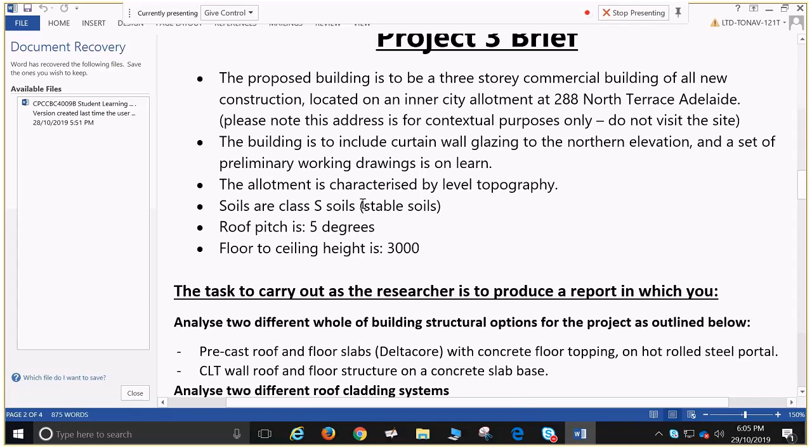So first up, have a look at research task 3 instructions. The proposed building is a 3-storey commercial building of all new construction, located on an inner city allotment at 288 North Terrace, Adelaide. Does anybody know what's at that address?

North Terrace, that sounds like university. Yep. Ayres House. Anybody know Ayres House?

No? Okay, so North Terrace and South Terrace, where they meet, on that corner you've got the Botanic Hotel, with the Botanic Gardens across the road. A little bit further west from there, walking up North Terrace, is Ayres House, a historic house. Once upon a time, before my time probably, there were many mansions around the place.

Sorry, you said North and South Terrace—they can't meet. Oh yeah, sorry, North Terrace and East Terrace. So there's a Botanic Hotel on the corner of those, and Botanic Gardens sort of diagonally opposed there.

Then to the north of all that is the old Royal Adelaide Hospital—it's been knocked down, and there's a Lot Fourteen development happening on that site. Back on the southern side of North Terrace, a bit west from that corner, there's Ayres House, a historic mansion. Anyhow, in planning and building approval we deal with that site again, just because we need sites to create context for things.

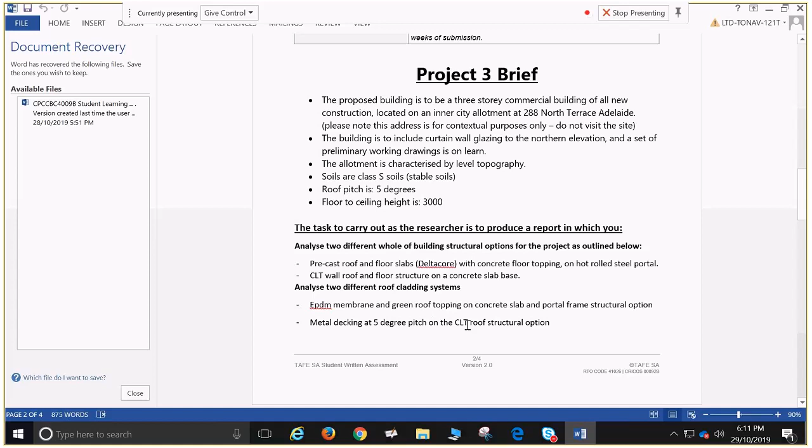Then analyse two wall cladding options. So an Alucobond Plus, that's an aluminium sandwich panel with polyethylene core, but minimum fire retardant within it. The other option is express jointed fibre cement sheet, so Cemintel Express panel.

I just said, you know what, it's going as it is, but here's the details on these. Same situation there, which is if you've got a cross-laminated timber, is that a finished product? No. And if it's not a finished product, and an Alucobond and express jointed fibre cement sheet, so you've given us a low embodied energy option there. That's where I was getting to.

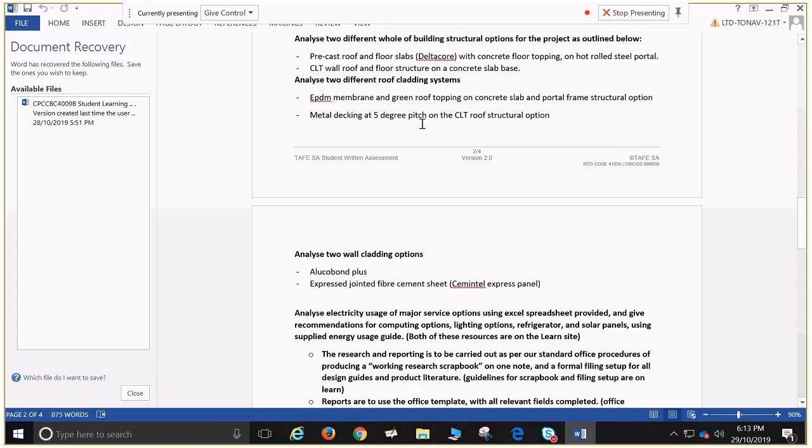That process should be fairly familiar to you. But then beyond that, this is the larger part of the assignment, analyse electricity usage of major service options using the Excel spreadsheet provided.

So is everybody here fine with using Excel? Mostly fine. I am goddess of Excel. People might be calling you late in the semester. I know the god of spreadsheets.

So no, you don't have to be a gun on Excel to use this. Everything's been put in there for you already, formulas, everything. All you have to do is fill in the yellow squares, so put numbers in. In fact it's probably best if you're not the god of spreadsheets, because I don't want you modifying it. No modifications, just filling in the yellow squares.

Using the Excel spreadsheet provided, give recommendations for computing options, lighting options, refrigerator and solar panels using the supplied energy usage guide. Both of these resources are on the Learn site.

The research and reporting is to be carried out as per standard office procedures of producing a working research scrapbook on OneNote and formal filing set up for all design guides and product literature. So once again, continue your filing system in your OneNote, and reports use the Office template for relevant fields completed.

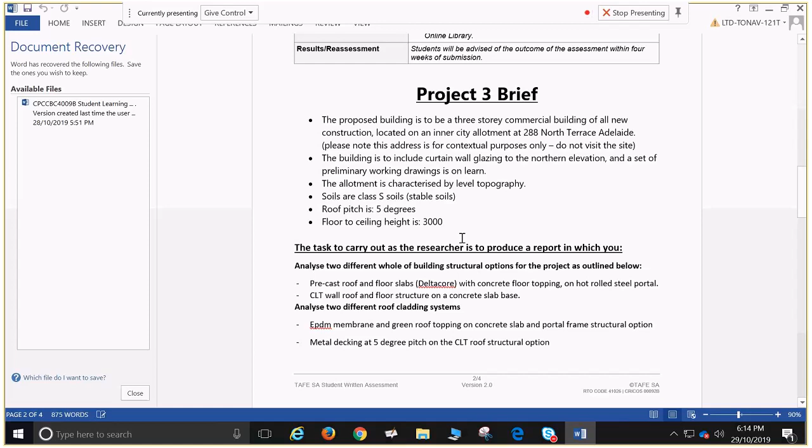Might have to close that, we need to have a look at that again. Won't go through the Office template this time. The headings have changed a bit, but work through it, and if you have any issues, come and see me. I don't think we need to bore you too much with that.

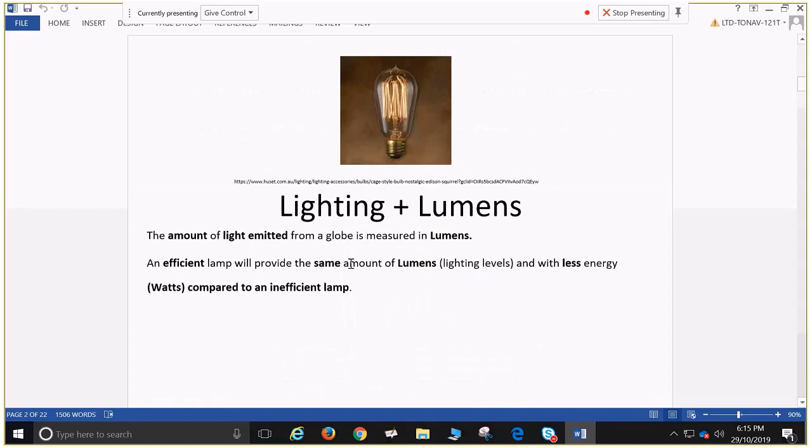But what we will have a look at is the energy calculation information. We're only just going to look at this very briefly because we'll go through it in detail in a few weeks' time. So a bit of information here on energy, what it is, use, etc. Feel free to go through this at home if you wish, but we will cover it as the last lesson in the subject.

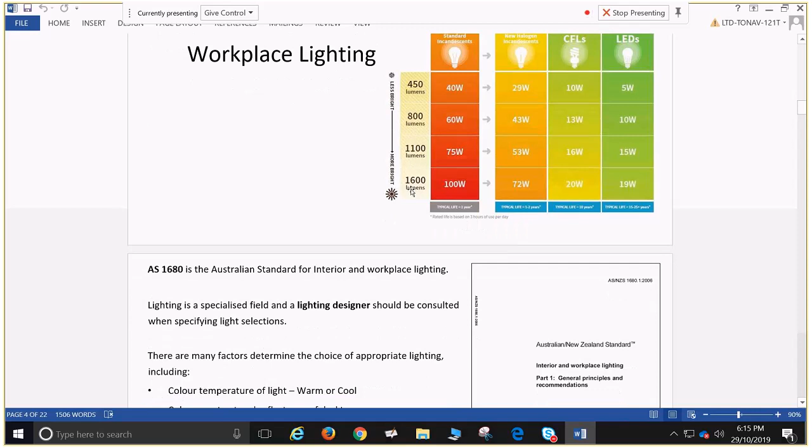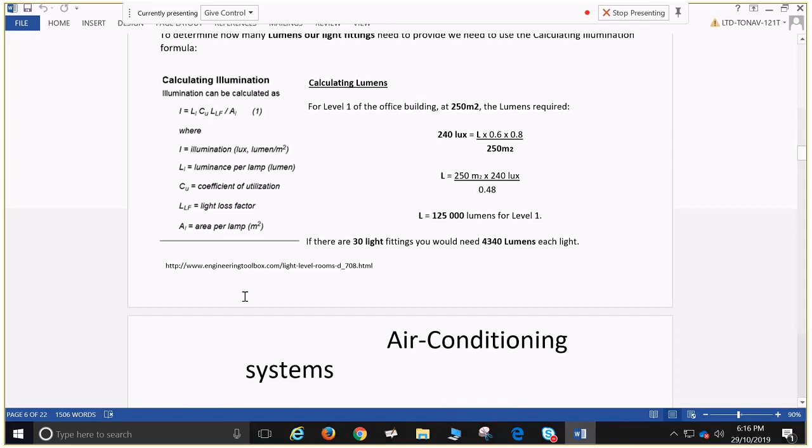Talking about lights and lumens, etc, and then about how we approach the specification of office lighting, so lux versus lumens, and then you're going to have to do some calculations. Don't be daunted by these - yes, there are equations, but it can be broken down to be very simple.

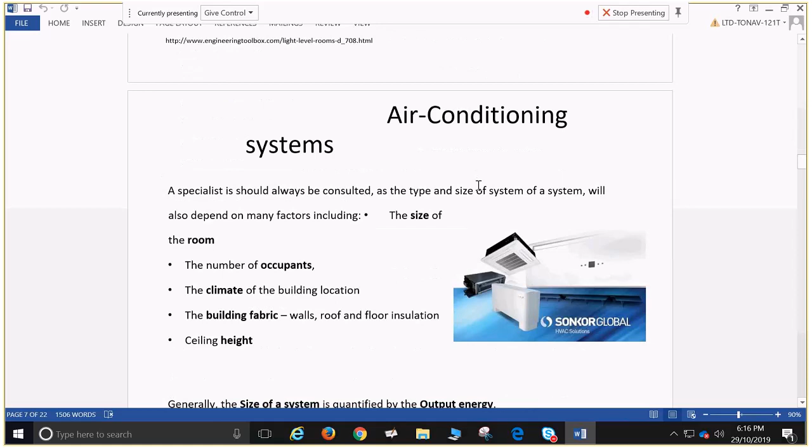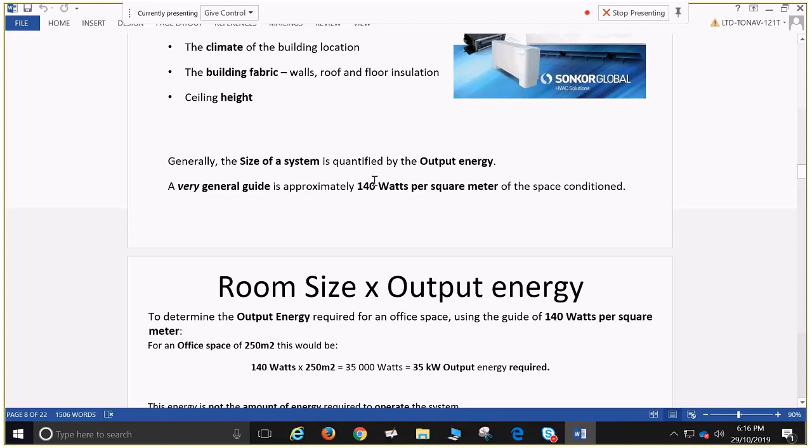Also talk about air conditioning systems, and we'll see a little bit about how we go about sizing up air conditioning systems. It's quite a complex thing, but we make it really simple because there are simple approaches and more accurate approaches. We're taking a very simple approach: it's about your square meterage of office space, your air conditioning multiplied by 140 watts per square meter, basically. So we'll be looking at that.

Have a look at computers and think about some computing options that are going to be low energy usage. That can be a little bit more difficult to find because it depends on how you use a computer, how hard the processor is being driven. I'm not really looking for hard and fast answers around that.

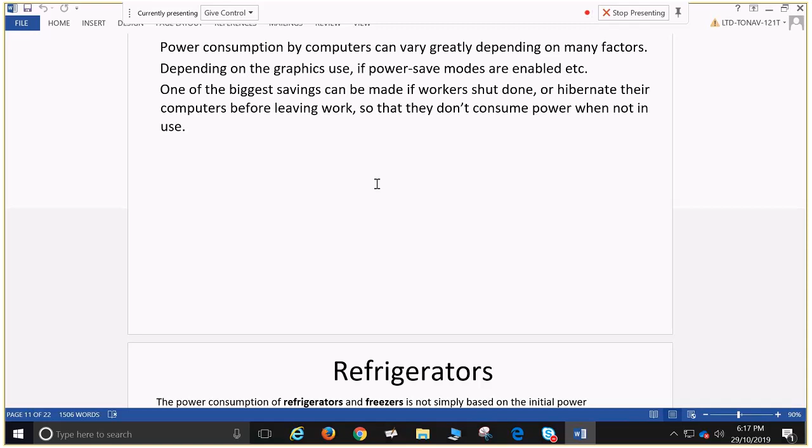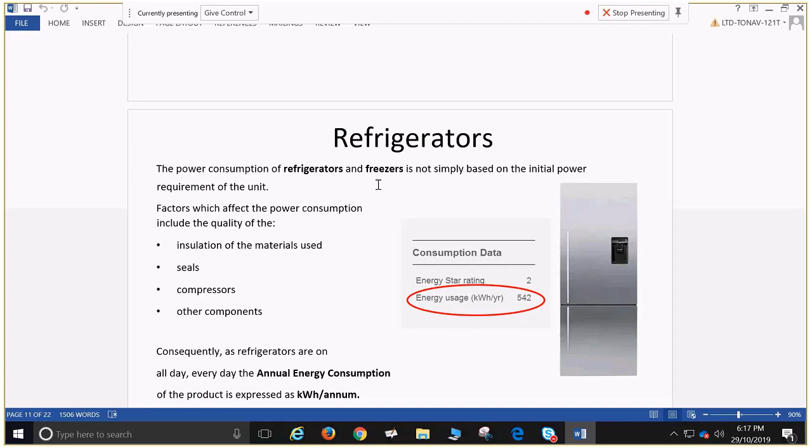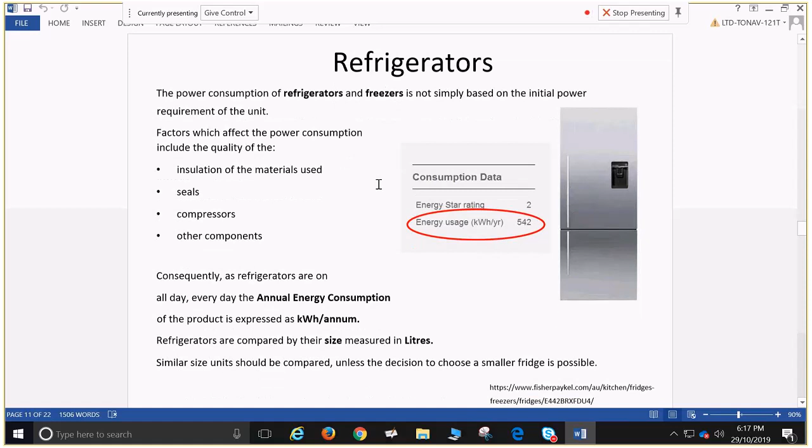It's general answers, saying this is a lower energy use option, and we can talk about that. It's not just about the specification, it's about the usage protocols - the way you use it. Those are actually where you make savings. This is something you've had a huge amount of experience in, coming from procurement.

Also, we'll have a look at refrigerators, finding a refrigerator that's going to be suitable for the situation, and also determining the number of solar panels for the building.

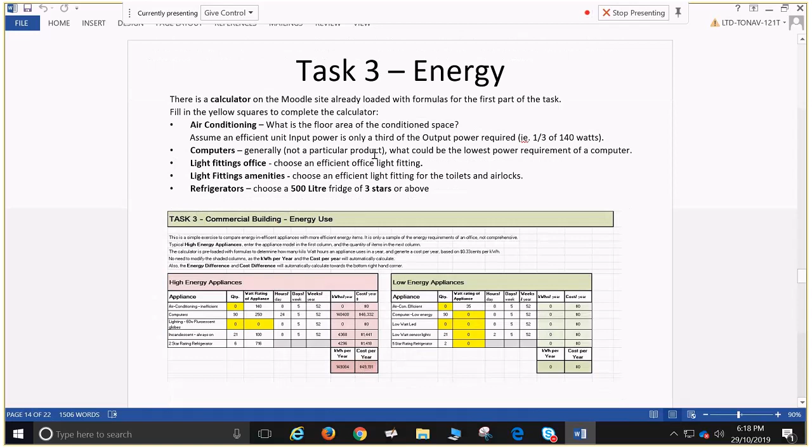We'll have a look at grid systems versus standalone. This is part of your spreadsheet you'll be working with - there's a little bit more tacked onto the bottom of it. So you're filling out the yellow squares. All the formulae are embedded in there, and you have to basically put in things like square meterage for your air conditioning spaces, wattage for your low wattage computer options, that sort of thing.

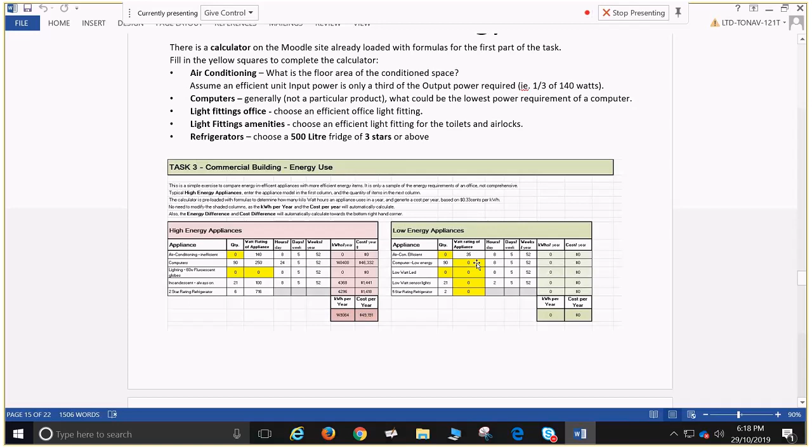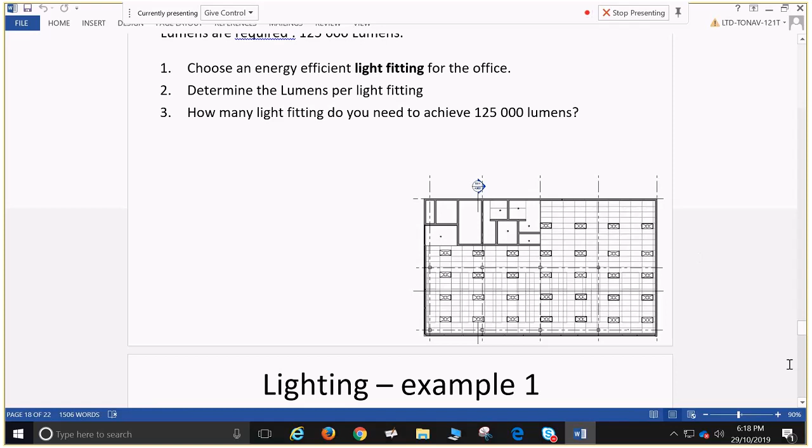I think I'll leave it at that because we'll just quickly scroll through. But it doesn't offset the building against the energy usage, does it? This process here doesn't go as far as offsetting the building - we're not working out the total embodied energy of the building, or continuous savings and actual detail there. It'll be lovely to get into that detailed modelling, but at Cert 4 level we've got to keep it contained.

So I've got to switch to the diploma next year, have I? Well, even in the diploma you're not going to get to that extent. I'm not sure what you cover in sustainability, but that is an interest of yours. You can take things as far as you want - I'm not going to put the brakes on, but we have to keep it contained at this stage, because I don't have the time to take it as far as I want.

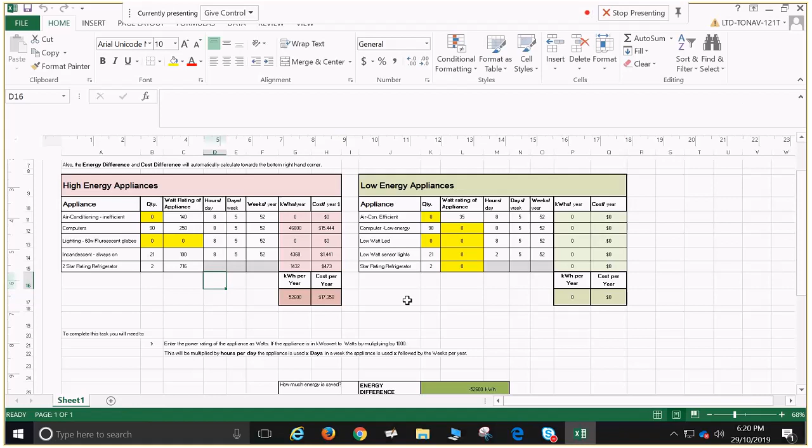We'll just very quickly look at that Excel spreadsheet. So we're filling in the yellow squares with that one, and then it will give us our costs per year based on a rate per kilowatt from a couple of semesters ago, so probably significantly outdated now, but it's about the comparison more than the total figures.

Then it goes into how many solar panels we need to provide that amount of electricity, and then the final yellow square is working out how many years it will take to pay it off. That's fairly simple - we can go into this in more detail in the final week.

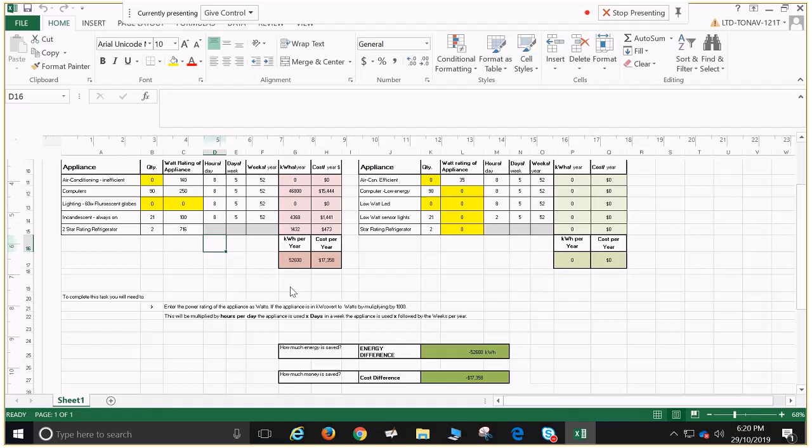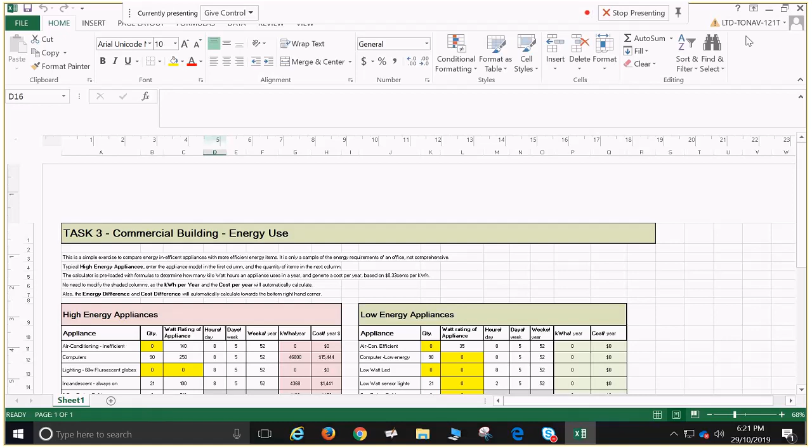Be prepared that with the assignment, there is a fair chunk this time on your services. It's not just a little add-on bit at the end, but probably about a third or close to half of your work in this report.

So what we'll be going through over the next few weeks - we've got concrete and steel structures to have a look at, and that's what I want to cover tonight: hot rolled steel portal frames, and also concrete in a commercial context. Then we've got to cover cross-laminated timber and green roofs - I'll combine those two together, so that's for next week.

Then after that we'll look at our energy analysis for that final portion - oh, sorry, no. The week after that it's claddings and energy analysis as well, including steel claddings. So it'll be this week hot rolled steel and concrete, next week CLT and green roofs, and the week after that commercial claddings and energy analysis to round it out.